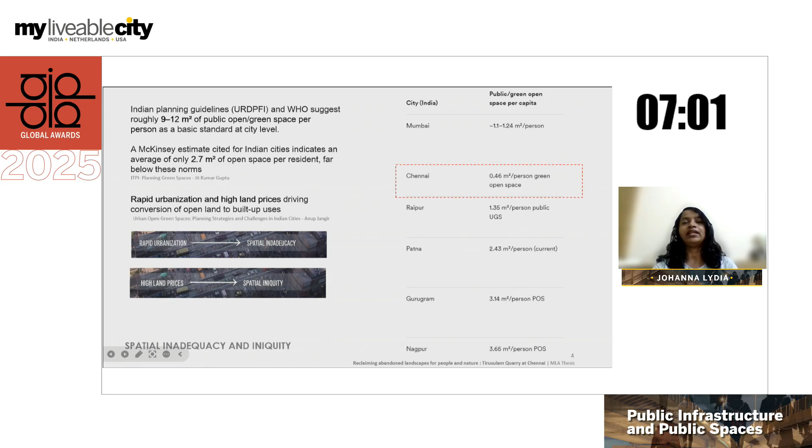When we think of public spaces and infrastructure, we often think of lands like this, streetscapes, or even waterfronts. These, like Chennai, where it's very low, below the standards required by WHO. Rapid urbanization has led to spatial inadequacy and high land prices, leading to spatial inequity. How do we solve this?

By considering sustainable sites which have been abandoned, like brownfields, landfills, or even quarries, like the Tirusulam Quarry, which is my site, much closer to our homes than we have imagined. Because people here in Chennai and even around Tamil Nadu, the state it is located in, come here to visit it. It's a well-known tourist attraction spot here.

But since it's not regulated or developed, and was abandoned in 2012, this has led to many issues, in spite of it having many potentials, like accidental falls, and surrounding industries which happen to come because of the quarry, which is a Charnockite quarry, leading to sand units being around the site, leading to air pollution.

And the government sees it as a potential water source for the city's water woes. And the people in the city see it as a potential tourist spot, and nature sees it as a place to inhabit.

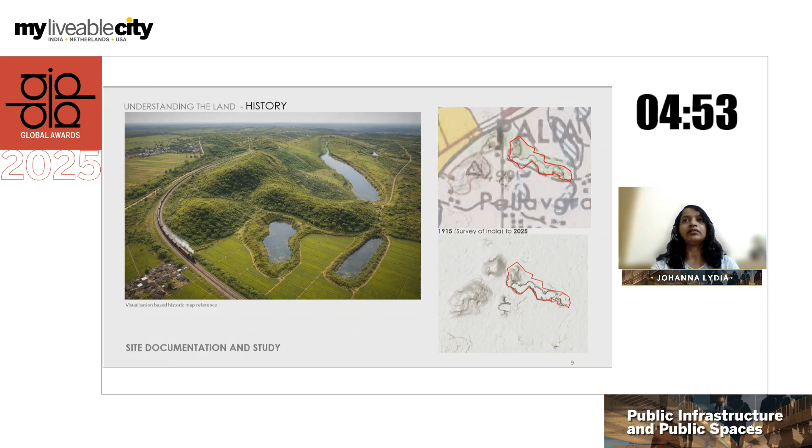And when we see the history and understand the land, we can see that around 100 years back this was a small hillock, and it has been quarried out to become what it is now, surrounded by dense urban area. This once was in the outskirts of the city, and is almost in the middle of the city now.

In spite of it being very well connected, it's very near to the port, connected to stations, connected by city roads. The area itself is not much accessible because it's unsafe, and it's surrounded by industrial zones and hillocks.

Major landmarks around it we can see are very institutional and residential kind of zones. And people often come here for a trek on the nearby hill for recreation.

The land ownership is government land.

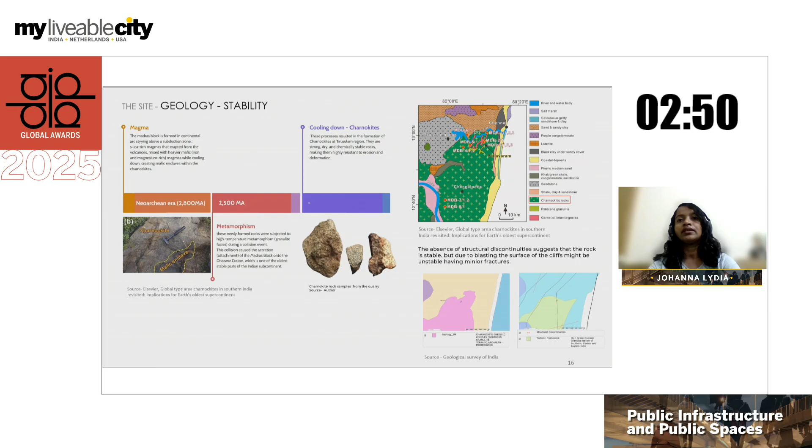When we try to understand the site itself, it formed millions of years back through magma and volcanic eruptions, causing magmatic metamorphism which formed the Charnockite rock now present in the quarry, well known for its strong durability and used as coarse and fine aggregate in construction.

As we dive deep into the landform, we can see it's made of in-situ bedrock with a very thin layer of sand, which suggests we need to reclaim the soil. Since it has been quarried out through blasting, it has a very strong cliff character to it.

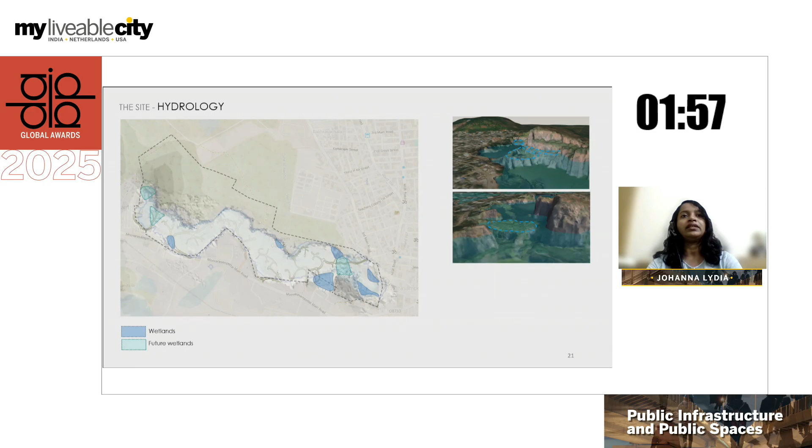Studying the hydrology, we can see there are many types of land within this quarry: highlands, lowlands, and wetland areas. Natural succession has already occurred, and it has become a good wetland space for birds and other wildlife.

At the city level, we can see that it's highly disconnected from the existing canals and water bodies, which in turn connect into the sea.

The quarrying not only affects surface water flow but also groundwater flow, which needs to be reclaimed. Considering the amount of water that flows into it and the peak annual rainfalls, this has huge potential to be used as a freshwater source, which is already being considered by the government.

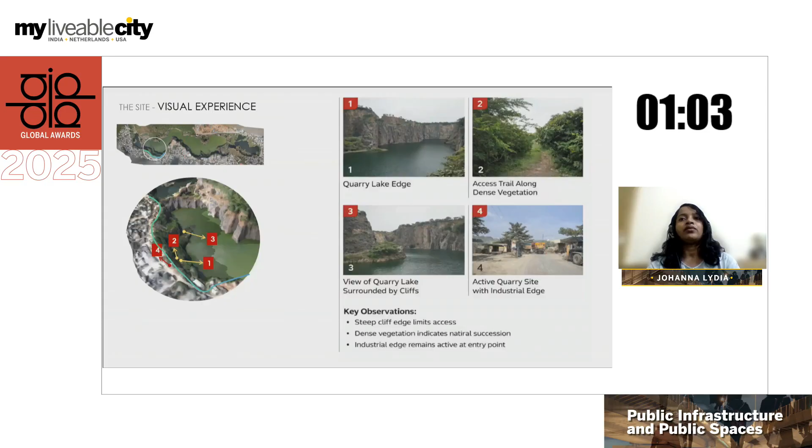Looking at the visual experience of the Quarry Lake, we can see it has huge cliffs, with one half bordered by an industrial zone that is quite dusty. These areas have been visually documented and analyzed.

Ecologically, the area has been covered by invasive species as well as non-invasive species. Through this study, we can see it has huge potential to be developed into a forest ecosystem. Studying the elevation and slope, we can see this can be used for various activities.

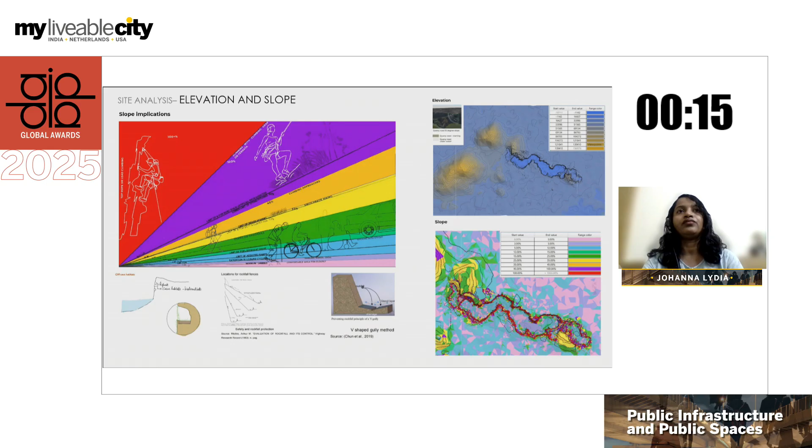These activities include walking, trekking, and other recreational uses. The trees have been documented, and almost 50% are invasive species which have been planned for removal.

When we study the people after visiting the site, we can see that people see it as...

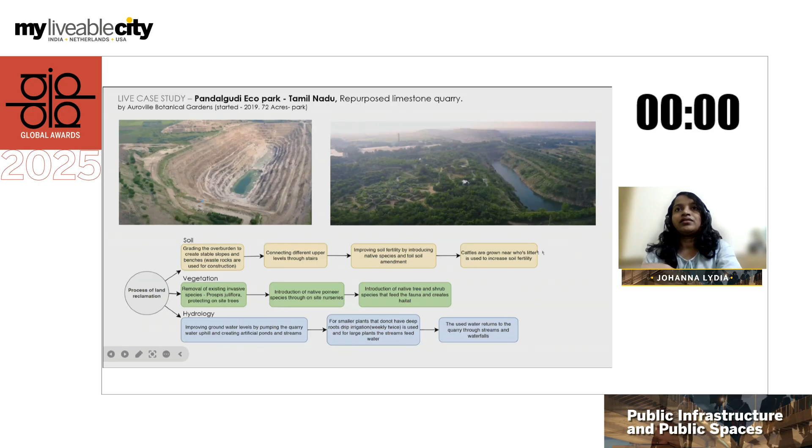Just a minute, I was unable to see the countdown on the screen. Okay, so... okay, I'll just...

Tell us about the design—when you have 8 minutes, you should stay within 8 minutes. Yes, but I was unable to see it. No, doesn't matter, you should know your own time. Okay, yeah, thank you so much.

So, very quickly—my question is, given the site has much potential on the natural issues side, are you still allowing people in your design to go there and disturb it, or are you able to combine the different interests?

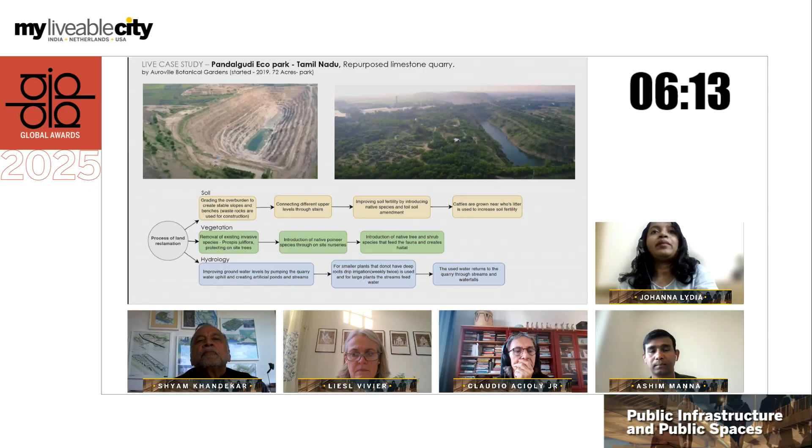That's my question. I'm able to combine the different interests by understanding the people's needs and the site's potential for nature to be inhabited. I'm separating zones of natural sensitivity so nature doesn't get disturbed by people, while people can still safely enjoy nature through boundaries and different types of uses for different age and people groups.

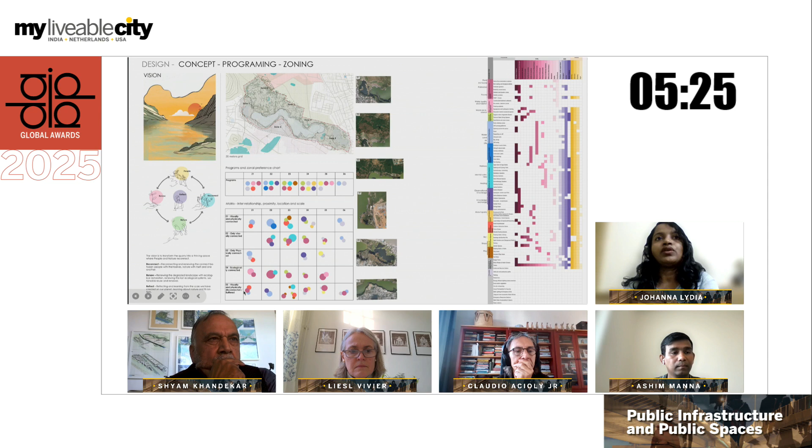In the landscape perspective, I'm also providing native species allocation which helps environmental regeneration in the area. These zones segregate people and nature so they don't disturb each other, while still allowing them to co-exist within each other.

Okay, thank you. Other jury members—I can't see them somehow, but Liesl, Claudio, Ashim, does anyone have a question? Yeah, I do have one. I have a question. Go ahead.

There are many different organizations and people trying to make claims on it—nature, people, but also the city using it as a water source. Do you think the improvements you've brought will allow the government to use it as a potential water source?

Yes, of course, much better because of eutrophication, we can see that the entire thing has become algal bloom currently, and they're unable to use it properly. So by providing wetlands and treatment gardens around this area, wherever the water inlet comes naturally, I'm able to treat the water through natural remediation, making it much better and safer for people to extract. As we saw in the study, the water level rises around 3 meters per year because of the surrounding runoff. So it won't affect the amount of water being extracted, while also making sure that people get water and nature gets water and habitat around.

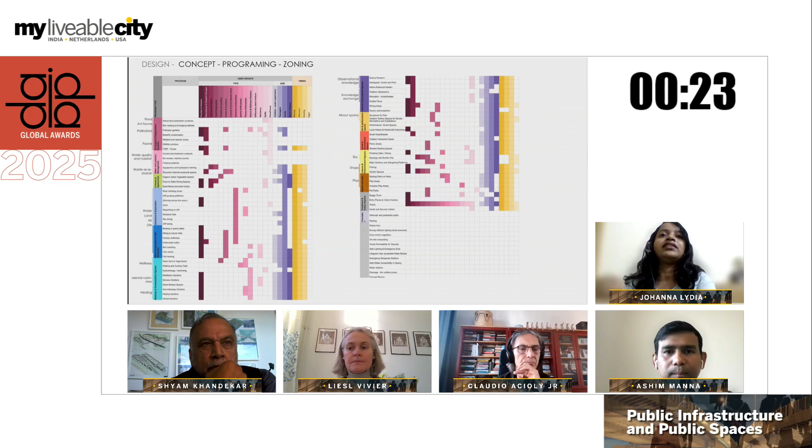Yes. First, when it comes to access, before this design, the site was not very accessible from the surrounding areas because of the landscape itself. So the first thing I'm doing is making multiple entry points and parking areas so people can come from all around the site and access it safely. I'm also creating a border for the safety of the people. There are different types of uses for different age groups and different kinds of people who might be interested in coming here — tourists, people coming for educational purposes, and people of different age groups — which causes continuous interaction between the site and the people, so they don't abandon the site or misuse it. When it's maintained properly, and when they feel they belong there and there's a use for them to come.

Okay, thank you. Thank you. Okay, thank you Johanna, it's a very inspiring project. Thank you for your presentation. Thank you, sir, thank you for the opportunity.

Okay Afak, we go to the next one. By the way Afak, at a certain moment I also could not see the clock, so can you do something about it? I don't know if other jury members could, but I couldn't see the time.

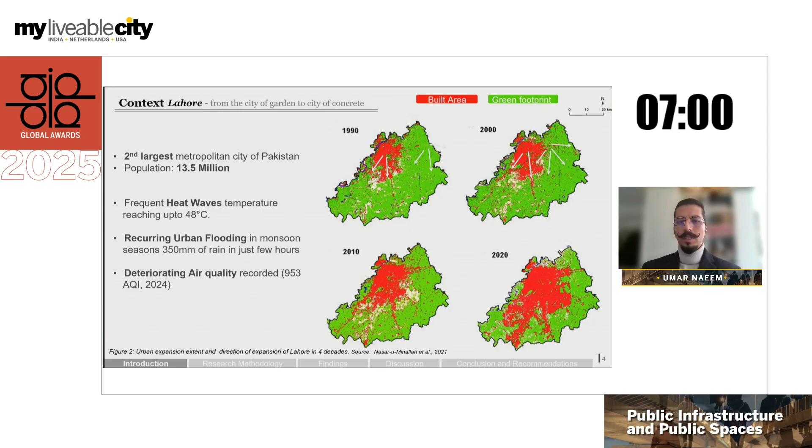This crisis is often linked to green space loss. In the last three decades, Lahore has lost about one-third of its green footprint, while built-up area increased roughly fourfold.

From this setting, I derive my central research statement: this is not only ecological loss. As green space disappears or transforms, citizens are disconnected from everyday nature. At the same time, road infrastructure development projects are narrowly framed as technical interventions, which overlooks the socio-ecological needs of diverse citizen groups.

My research is based on three primary theoretical pillars: objective nature, conceptualized as the physical form of nature, and subjective nature, understood as experiential nature, especially the people-nature relationship. The third pillar examines car infrastructure development as an external driver that impacts both.

This is the conceptual framework which illustrates that infrastructure development affects urban nature, which changes the people-nature relationship, creating both potentials and opportunities to mitigate extinction of experience.

So the main research question is: to what extent does infrastructure development, within the ambit of urban nature transformation, impact the people-nature relationship? I examined how urban nature forms and qualities have changed, how people perceive and interact with urban nature, and the perceived impact of infrastructure development.

For that, I developed a people-nature relationship framework through indicators of perception, interaction, and values associated with urban nature experiences. Infrastructure development impacts were analyzed across ecological, spatial, and social dimensions.

This research was based on a single exploratory case study approach. The 30-kilometer canal, a green, blue, and gray corridor, traverses diverse neighborhoods from low-income dense areas to high-income low-density areas. The road expansion started in 1996, completed around 2018, and included about 7 meters of road widening on both sides, encroaching on green areas.

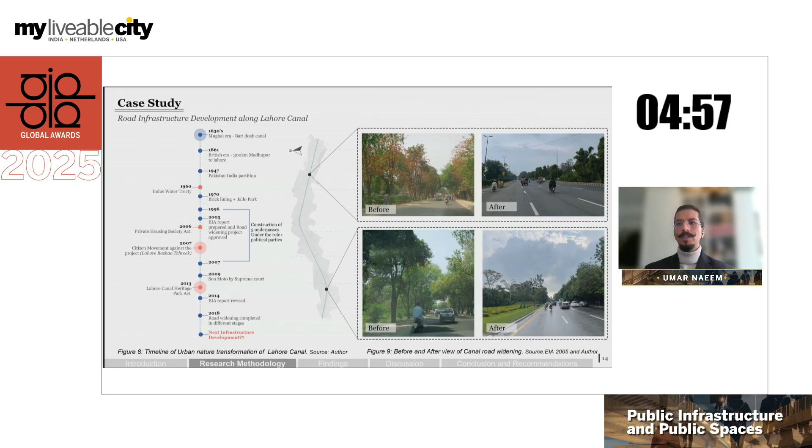Interviews repeatedly linked this road expansion project to the development of housing societies toward the southern edge of the canal corridor. Here we can see before and after images showing how the canal transformed from a green corridor to a mobility corridor. A mixed method approach combining qualitative and quantitative data was used.

Methods included semi-structured interviews, field observation, spatial mapping, and questionnaire survey. Data was collected from March to May, and I divided the 30-kilometer canal into 5 sections. Section 2 represents the low-income, dense neighborhood, while sections 3 and 5 represent high-income neighborhoods and low-density areas.

Coming to the findings, this is the overview and structure of my findings, explaining each research question, and these are a list of few selected findings.

First, the canal's urban nature was physically reduced, and mapping shows the extensive conversion of green areas to road expansion. At key intersections, ecological fragmentation points emerged in the mapping analysis. Approximately 60 acres of green space were converted into sealed surfaces, and 5,000 trees were lost.

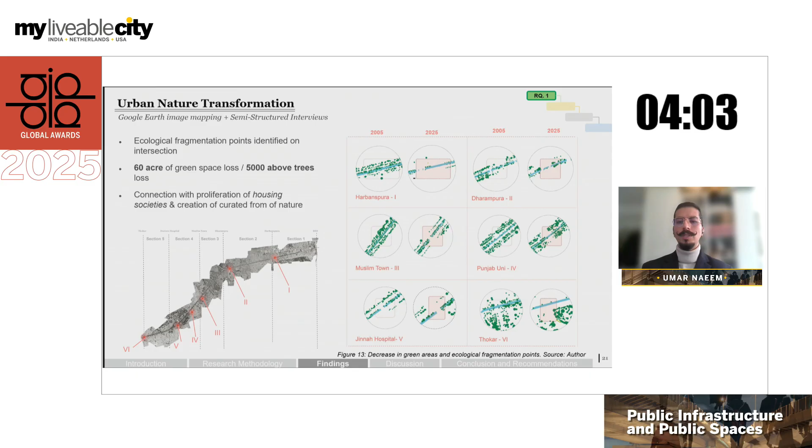But this was not only a loss of green space. The forms and qualities of urban nature also transformed. In some locations, urban nature became more curated and manicured, while in others it became inaccessible and completely erased.

Section 2 showed the lowest provision of green spaces in the vicinity and the lowest tree species diversity, as identified by the PHA, and this was confirmed by citizens as well. They also perceived Section 2 as the most affected area, and Section 4 as the most ecologically rich area.

76% of respondents recognized the canal as a valuable urban nature resource, and knowledge of biodiversity remained high. But there was a mismatch in management.

For example, respondents from Section 2 showed higher preference for ornamental plantation, yet these were the areas with the most eroded green spaces and weakest maintenance. This result shows the contradiction between the gap in maintenance and citizens' preferences.

Interaction with urban nature also showed some disparity, where Section 2 was the most active zone, with activities like swimming, intergenerational gatherings, and citizen-appropriated communal spaces such as Eidgah and Jirga places. All of these activities were happening in areas with the lowest provision of urban amenities and safe access to the canal.

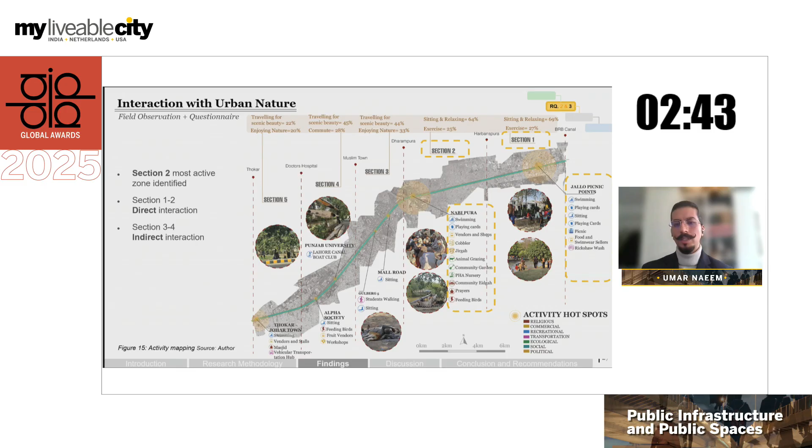This transect analysis shows where the ecologically rich areas and public zones overlap, and where they overlap with noise, speed, and unsafe crossings.

The perceived impact of road widening on urban nature are mixed, but the pattern emerged that most of the negative impacts were reported higher among the women, older respondents, and respondents from Section 2 and Section 1. In interviews, people repeatedly described the sensory disconnection, reduced accessibility, more accidents, loss of heritage trees, and women and children expressed deep security and safety issues.

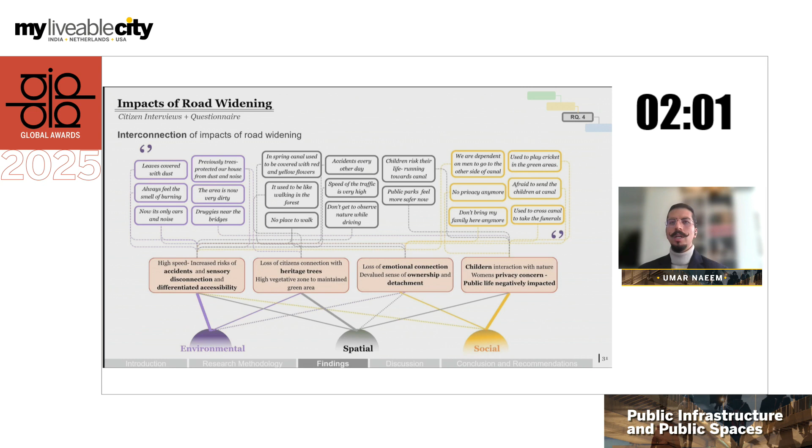All of these notions impact the infrastructure development were found to be interconnected in the dimension of spatial, social, and environmental. Putting this together, infrastructure development transformed urban nature within new settlement and curated green space emerged, while liminal green spaces along the canal found to be most vulnerable.

This aligns with the urban political ecology discourse of how class positionality shapes what form of urban nature is produced and for whom. The perception and interaction with urban nature are not fixed. They are shaped by urban morphology, social demographics, and provision of green spaces.

That was also corroborated with these authors. People-nature relationship with canal urban nature is non-homogeneous. Authorities largely treat it as a mobility corridor, but citizens, especially from dense area, value it as a social and cultural refuge. So in that case, these liminal green spaces offer intermittent opportunity to connect with nature and have a potential of mitigating the extinction of experience.

But road widening introduced new vulnerabilities, and thereby it reverses the effect and reinforces the extinction of experience.

Based on the synthesis of the finding of this research, following recommendations are drawn on a 3-point scale. First level is the site-specific scale, where the zones that are identified as ecologically rich area and high interaction zones, they should be treated as the area-based management.

Second is the corridor scale. Since such urban nature spaces hold significant social and ecological value, these can act as an ecological learning lab in collaboration with schools and universities.

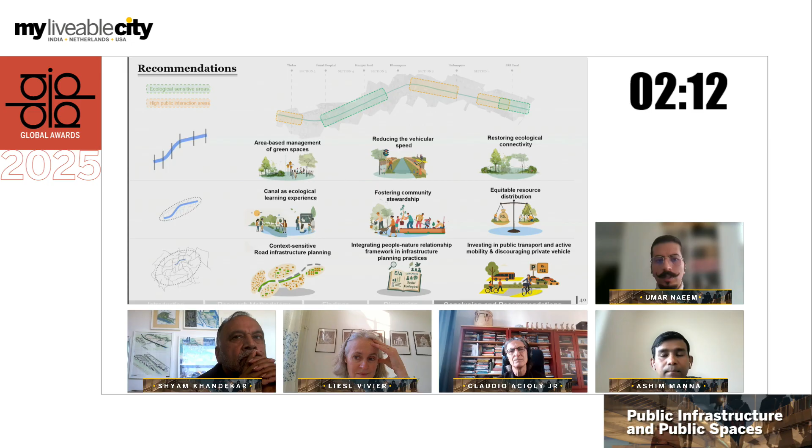Thank you so much, Claudio, for your question. I recommended reducing vehicular speed, but this doesn't mean actively imposing speed breakers or signals. This intervention should be context specific, as I highlighted in my research—there are a few sites which are ecologically sensitive zones, and a few sites which are more public interaction zones. By reducing vehicular speed in ecologically rich areas, we can change the pattern or texture of the road so it becomes more porous. This passive strategy would reduce speed since the intervention has already been done—the road has already been expanded.

In high public interaction zones, more active measures can be taken—after certain points where more people are gathering and where we have public transport infrastructure, we can add a layer of active measures such as speed breakers or crossing areas. That's also one of my recommendations for the planning discourse: the canal corridor is highly heterogeneous, so now we're proposing interventions after the implementation. These considerations should have been taken earlier, so the road infrastructure was designed to respond to the immediate context. I hope I was able to answer your question.

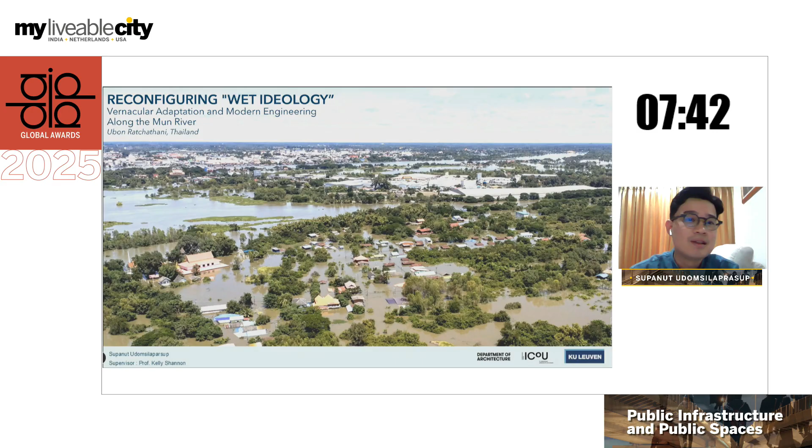This project is located in the Mun River Basin in the northeast of Thailand, the largest sub-basin within the Mekong River Basin. The basin is influenced by the flow of the Mun River, which collects water from the west and flows into the Mekong River in the east.

This dynamic creates an outstanding seasonal floodplain along the Mun River. Particularly the lower part of the Mun River Basin illustrates how the river plays a vital role in shaping both landscape and settlement, responding to topography and seasonality. This led to the selection of a study area within a boundary of 24 by 18 kilometers, highlighting the relationship between seasonal floodplain and settlement.

In the past, as a wet ideology, floodplains were preserved from seasonal flooding and settlements were built on high ground. However, urbanization introduced modern infrastructure driven by a dry ideology, leading to conflict between natural landscape and development. This tension has become visible over the past 30 years of flooding, and it is expected to intensify due to global warming in the upcoming future.

So today the question is no longer whether the city will resist the water, but how it will live with it, and how the city can integrate wet and dry approaches as an innovative design to live with this condition.

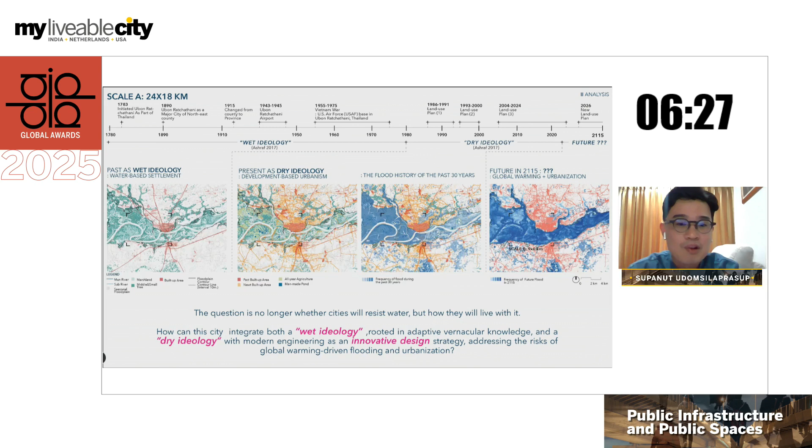To answer this question, the analysis selects a critical area from the 24 by 18 kilometer zone and zooms into a scale of 9 by 6 kilometers, using 6 different maps to show the transformation from wet to dry ideology over time. First, a geomorphology map surveyed by geomorphologists clearly shows how topography and the river shape the seasonal floodplain landscape, reflected in the pattern of water-based settlement. The first urbanization still follows the logic of the water and landscape.

However, today the city has expanded into the seasonal floodplain through built-up areas and massive infrastructure. This dry approach will continue through public and private projects in the upcoming future. Furthermore, according to the prediction for 2115, future development is clearly in conflict with the risk of flooding.

To better understand the transformation from wet to dry approach, the analysis overlaid 3 different maps in the 9 by 6 kilometer territory and proposed several work sites, selecting 15 squares, each measuring 400 by 400 meters.

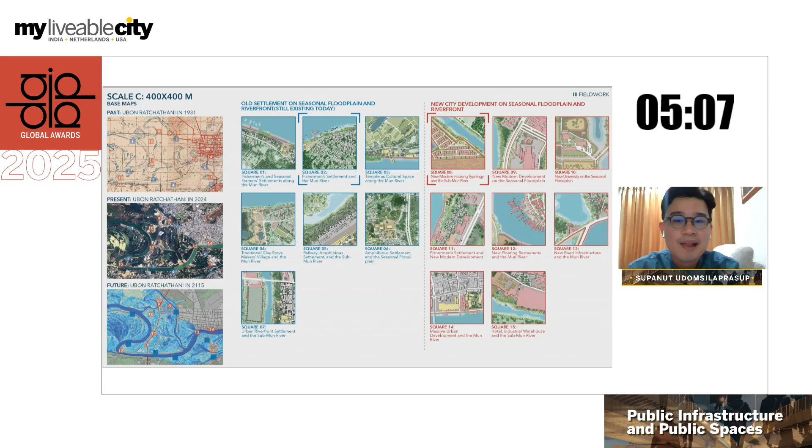7 blue squares represent all settlements that still exist today. Meanwhile, 8 red squares show city development on the seasonal floodplain. In this presentation, 2 outstanding squares have been selected to represent the wet and dry approach.

On one hand, the blue square represents the wet ideology as a water-based settlement from the past that still exists today. Along the riverfront, the settlement maintains its housing typology. This area clearly shows how the settlement still relies on the river as part of its living system.

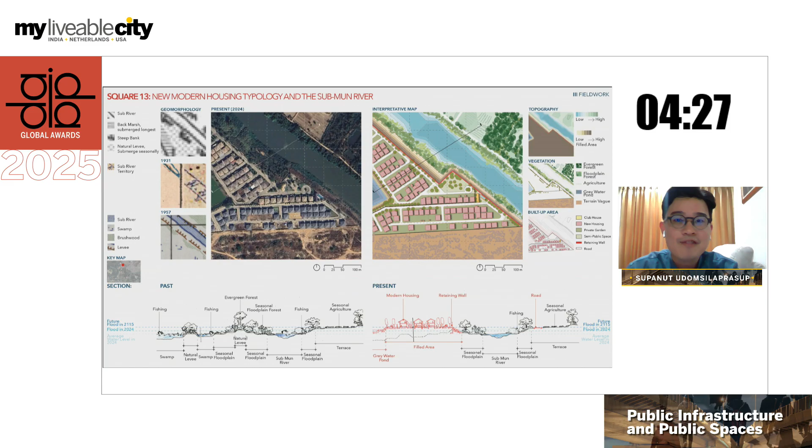On the other hand, the red square represents modern development. New massive housing typologies were built directly on the seasonal floodplain, transforming the floodplain from a public space into private property. So the dry approach clearly shows in this area view, with massive infrastructure driving the city development.

So across multiple scales of analysis, there is a clear conflict between landscape and urban development today. Urbanization will continue alongside increasing risk from global warming. This leads to a design strategy based on a hybrid approach, integrating wet and dry approaches as a water-based urbanism, where water and landscape become the foundation for shaping a new form of urbanism.

So the design begins with water and urbanism to understand the 2 different systems. In the past, water and landscape shaped the logic of the settlement. But today, the territory of water has decreased and been replaced by new modern infrastructure. Also, areas within the seasonal floodplain will be increasingly impacted by future floods.

Consequently, by overlaying past, present, and future conditions, the base map for the design becomes the 6 different landscape typologies in relation to water and landscape. This typology, including higher and lower ground conditions, creates an adaptive framework for new water-based urbanism within the existing landscape structure.

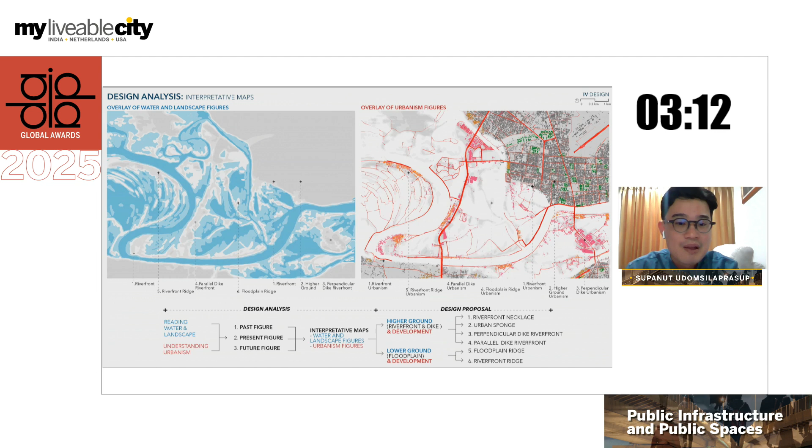On higher ground, a riverfront necklace creates a soft-edge landscape, integrating flood-adapted space while accommodating high-density development along the necklace. An urban sponge introduces a network of permeable landscape within the existing urban fabric, allowing water to be absorbed and stored.

Perpendicular dikes intersect the river, creating strip forest and development that work with the existing dike structure to manage the water flow.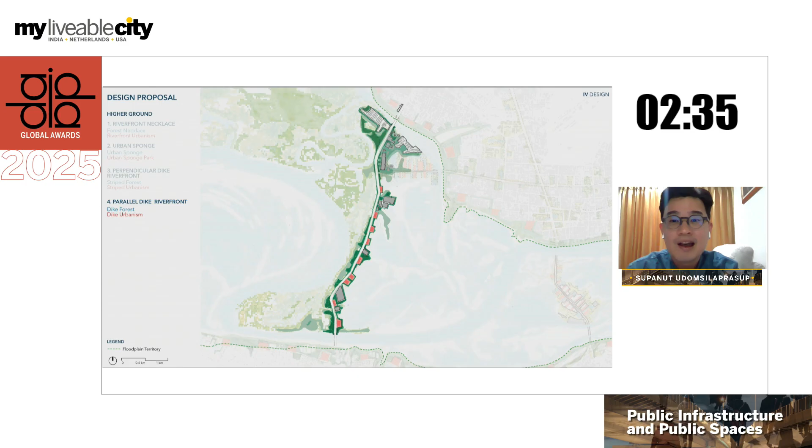Along the river, parallel dikes are developed but only on the existing dike, allowing new urban fabric to develop, while the floodplain on the riverside is maintained for the natural flood function.

Moving to the lower ground, the floodplain ridge creates the amphibian landscape, while proposing dispersal development along the ridge. At the same time, the riverfront ridge builds upon the traditional settlement, reinforcing local adaptation to seasonal flooding.

As a result, the proposal combines 6 different landscape and development typologies. This approach reflects the logic of water and landscape to frame a new form of urbanism. Particularly, the design accommodates worst-case flood scenarios, allowing flexibility and transformation across different water levels.

Hybrid, when translated into urbanism, is expressed through the typology that transforms existing structure into a variety of landscape and development typology.

In addition, hybridity drives into the detail, where architecture and landscape work as one system, merging Thai vernacular knowledge with soft modern engineering, understanding natural dynamics while accommodating urban growth.

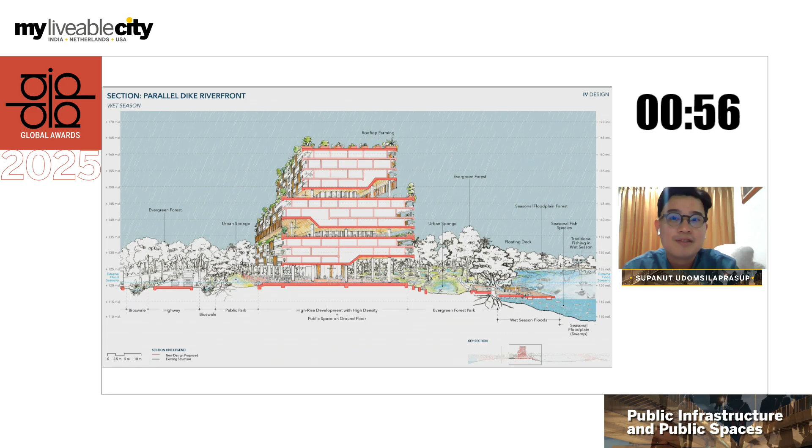So by layering vernacular knowledge and engineering logics, the project also proposes an adaptive framework for the upcoming future. It offers elasticity during the wet season, allowing the city to adjust and respond to water fluctuation.

In conclusion, this thesis clearly challenges the dominant dry ideology and offers a research- and design-driven alternative for future urban development. By reconfiguring wet ideology, the project introduces hybridity with a water-based urbanism approach that integrates tradition with technology, local memory with future climate protection.

By living with the water rather than against it, cities around the world can shift from resistance to adaptation, responding to global warming and urbanization in the upcoming future. So, thank you.

Thank you for your presentation. Very interesting. Yes.

Which of the jury members—maybe Ashim, would you like to, because this is water and land, something you would like to probe, I'm sure. But I'm sure all of us have a question. So please go ahead if you have one.

Ashim? Yes, sorry, I was unmuted. Do you have anything? Yes, I will just ask a small question.

Thank you so much for your presentation. I think it was quite extensively elaborated and very well explained. I think the analysis and the presentation drawings were quite clear for me.

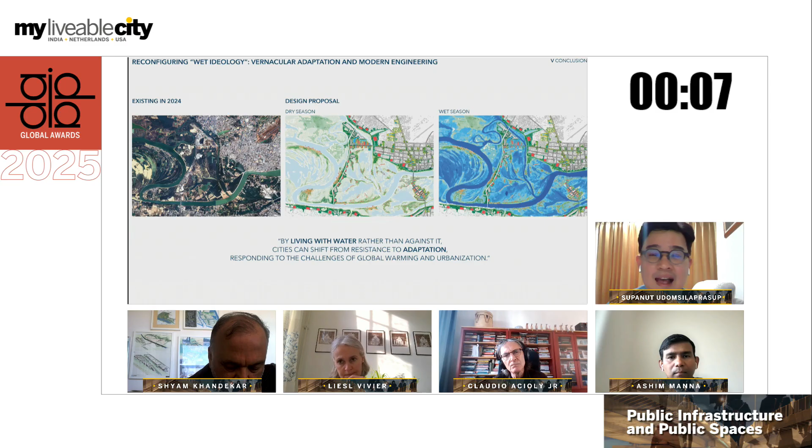I think the point is about how to understand the past, then understand the present, and understand the future. In my analysis, I went to areas where people have lived for more than 50 years - they have an adaptive way, like indigenous or vernacular knowledge, to live with the water. When new development comes, some developments just ignore that. But I think merging both wet and dry as an adaptive way might be useful, and I believe it can adapt to the city. It depends on who can integrate that. My approach is not just top-down, but also integrates bottom-up, and can combine them together.

Okay, thank you. Yeah, time. Thank you, I will pose my question separately, maybe. That's okay, we'll have the next person present now.

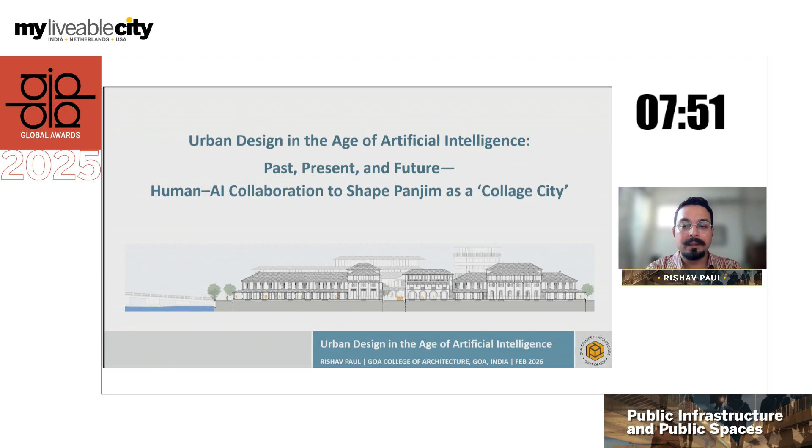Today, I'm going to present my thesis, Urban Design in the Age of Artificial Intelligence.

Urban design emerged as a formal discipline in the 1950s. It is a modern discipline, but an ancient practice. Urban form has evolved through shifts in power, economy, and mobility, from military and trade-based cities to car-dominated modernism. The most severe rupture occurred in the mid-20th century when modernist ideology and the automobile disconnected cities from human-scale urban life. The internet also altered it.

Today, AI marks a new shift, not of form, but of decision-making at scale. Urban design has always balanced intuition and structure, which is now under pressure. Cultural memory on one side, pattern recognition on the other, both powerful, both incomplete alone.

The central question which drove my research: how can humans as central decision makers collaborate with AI, informed by history, to shape future cities into collage cities?

Collage teaches us that meaning is not fixed. It depends on interpretation. Collage City was written as a critique of modernism's obsession with total design. It argues for cities as collages of fragments from different times, logics, and intentions.

Imagine the year 1980. A few years after Collage City was written, a student imagines the perfect city. Using figure ground cutouts of places they have lived, they layer fragments together. Collage as an architectural act of visual thinking.

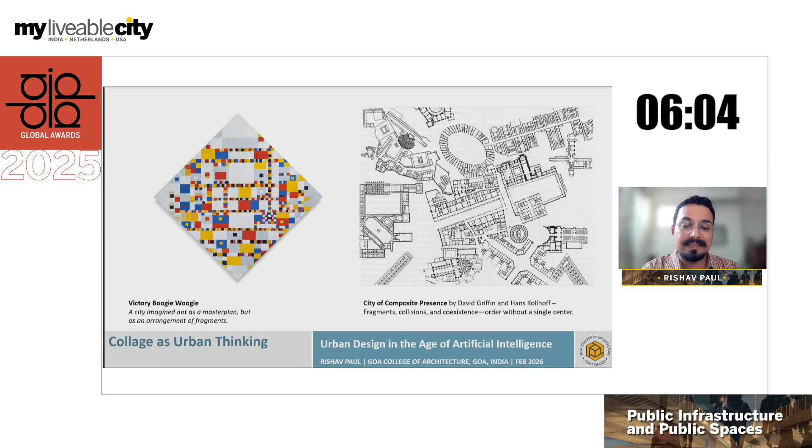As an urban designer, this imagined city is translated into drawings. Plots are defined, densities tested, and controls negotiated. Today, AI accelerates this same process. What was once a physical exercise can now be prompted into visual thinking across multiple media.

To explore this idea, I have developed a framework inspired by autonomous vehicles. Just as self-driving cars have levels of automation, I propose similar levels for AI in urban design.

The urban design automation spectrum ranges from level 0, traditional design, pure human creativity with no AI assistance; level 1, AI-assisted design; level 2, AI co-processing; level 3, human-guided AI design, where AI proposes complete design solutions based on historical patterns but human designers direct and refine these proposals; to level 5, autonomous urban design, a hypothetical scenario where AI would autonomously plan environments.

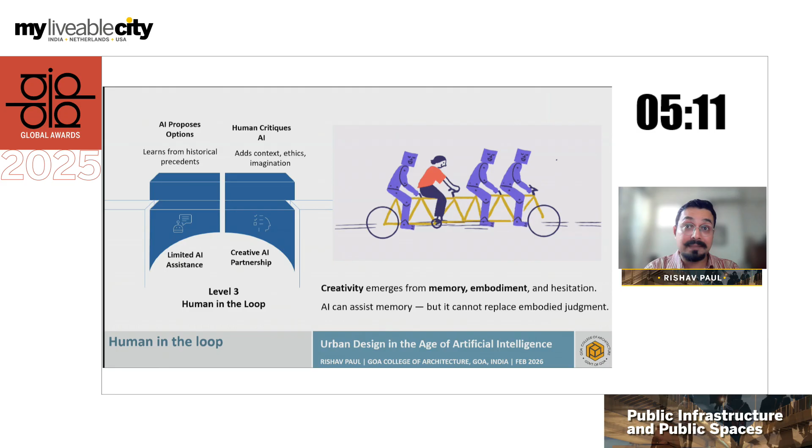I do not propose AI as an author. I propose a human-in-the-loop framework. Creativity is not computation. It emerges from memory, embodiment, and hesitation. AI can assist memory, but it cannot replace embodied judgment.

If AI is to assist design, it must be taught. Documentation becomes the ethical boundary. I documented Saint Sebastian Precinct in Fontainhas, Panjim, a historical site, not as nostalgia, but as a repository of tested urban intelligence.

Human documentation encodes spatial memory, enclosures, thresholds, gradients. This is what the AI is trained on. From human documentation at the historic precinct, the AI internalizes human scale.

It was uploaded to ChatGPT-4 for this analysis. It learned 5 key spatial logics. It identified the chapel as both a geometric and social center, mature vegetation as a privacy screen and climate moderator, and small junction widenings as microplazas that break long streets.

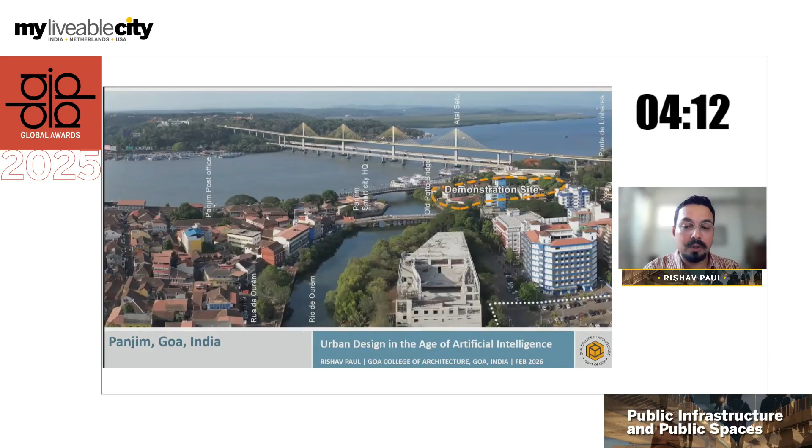Panjim is not a tabula rasa city. Panjim is a layered city combining a colonial urban core with surrounding semi-urban villages, resulting in walkable mixed-use neighborhoods and strong cultural continuity. The Patto housing precinct is a low-rise residential area located between the historic core and the newer commercial developments, currently under significant development pressure.

This structure plan shifts Panjim from a vehicle-led to a people-centered city. The Mandovi River becomes the civic spine linking major transport hubs to heritage areas and public spaces through a continuous walkable network. Traffic is pushed to the periphery, and instead of a single grand gesture, Panjim evolves as a collage of small civic nodes, where past, present, and future coexist.

I've used various AI tools during my thesis. I quickly analyzed Panjim's site through the lens of the 15-minute city concept. It helped map out how accessible key amenities are and reveal what we have already scored strongly on. Using Scenario AI, I unlocked speculative imagination by generating rapid visual what-if scenarios for Panjim, allowing me to visualize possibilities.

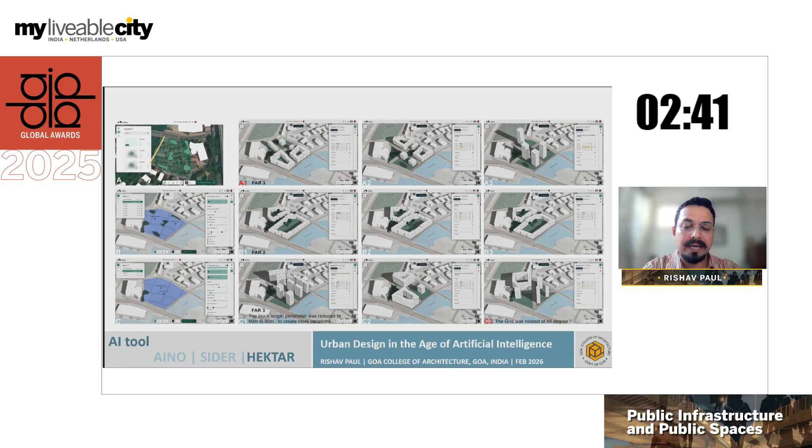Hektar AI let us input familiar parameters like FAR, setback, and height limits, and generated multiple massing options. It works systematically, laying out grids, parking, footprints, and heights. While efficient and thorough, it prioritized functional planning, leaving creative decisions to us.

Hektar independently produced low-rise courtyard layouts similar to those in the San Sebastian precinct. Despite not being trained on that historical data, the alignment suggested context-sensitive outcomes, which gave me the confidence to pursue those options further.

The proposed plan is structured around perimeter blocks with shared courtyards, supporting active streets and collective life. A permeable grid, colonnades, and pedestrian links prioritize movement on foot, while active ground floors and strong corners animate the public realm. Public space and mixed uses work together to create everyday social life. The street elevation shows how the design maintains a human scale, blocks inspired by Fontainhas, while accommodating contemporary needs.

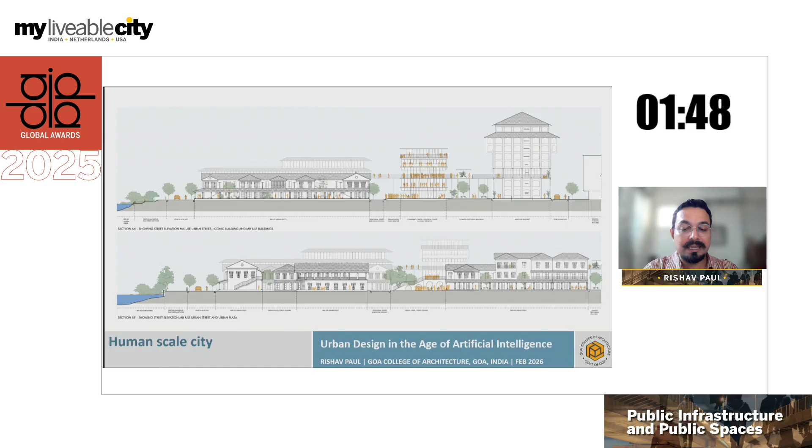The outcome is not a smart city. It is a negotiated city. To conclude, this thesis positions AI not as an author of cities, but as a collaborator in shaping public infrastructure and public space. When guided by human judgment and historical knowledge, AI can support plural, walkable, and inclusive urban environments.

Read through the lens of Collage City, the future city is not optimized or autonomous. It is negotiated, where infrastructure serves people, memory, and everyday life.

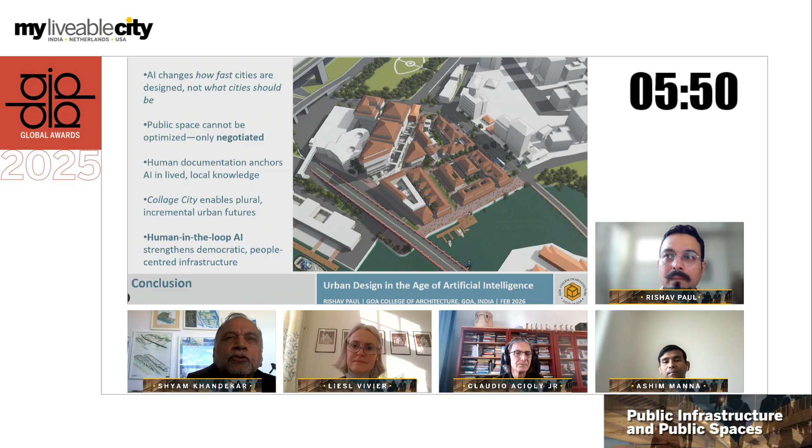This last neighborhood, can you just take us through the logic of how you came to this... I heard you till 'if I could take you to the logic.' Oh goodness, there's something wrong with me. Can you explain to me how you came to this design and which were the prompts which you gave to the artificial intelligence to get you to this? What had you asked?

All right, great. So I'll go move a slide before this. My whole semester, I was trying to understand how AI could possibly be used in doing urban design, but at the same time understanding this designer's dilemma that probably we have a better understanding. So it was not a direct prompt which led me to that, but when I used Hektar AI, it gave me these options which you saw on the right-hand side. At the same time, I was doing this collage exercise with Panjim City. So what I did was I knew of public spaces in Panjim City which work well, which are popular. I'm a resident here for the last few years. Then I tried to validate the options being generated by AI against the ones that were there.

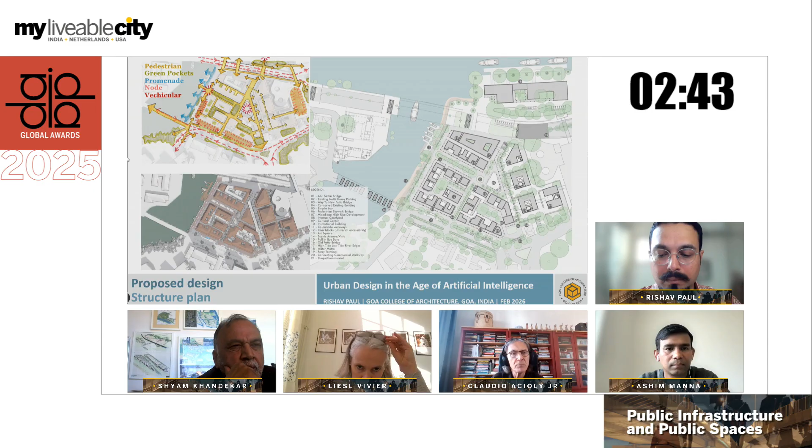Can I come in? Yes, please. Thank you for your presentation. I think you mentioned that we need to teach AI to behave in the way we expect them to behave, to bring us the best of the options to a particular problem. So I think you're demonstrating that there is no way back once we start mastering more and more of the tool. I would like you to elaborate a bit on what are the limitations and the risks that you find while exercising to come to this product, based on the parameters that you showed us - livability, scale, accessibility. So what's the limitation and the risks that it brings with it for the outcome?

Okay, thank you for your question. So I'm going to first try to break this idea of tool - tool as something which is tangible versus, in this case, an intangible tool. And this tool is just like an extension of a human brain. Now, the risks with AI currently is there's a lot of noise, so one has to filter through all of that - number one. Number two, the quality of data that one has. In the context of India, the open source OpenStreetMaps are not well updated. In the case of Panjim, it was, so I could do this particular analysis and move quickly. So that could possibly lead to oversimplification of things. So while I'm saying that the data set needs to be very well trained, let's look at this sort of exercise here.

I mean, in the hands of a person like a student, I would say it's a fun exercise. But imagine the kind of governments we have these days, somebody ends up with this sort of tool and suddenly says, oh look, you're going to design the city right away, not even giving it much thought. So the risks are obvious, I would say.

And coming back to where I was, it's not like a holistic thing, right? It's like a collection of things, a collage of all the available tools that were there. And in this case, I would say there are no curves, it just probably helps understanding the massing exercise. So yeah, I hope I've answered your question.

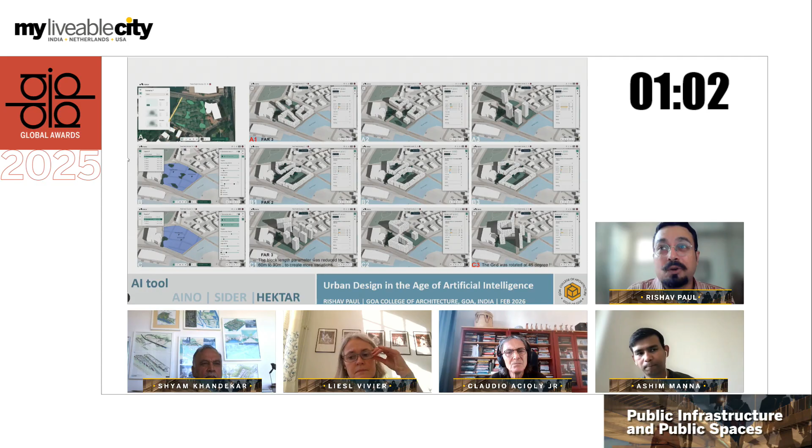Yeah, partly, but it's a dynamic process of mastering, and I think you showed the prompt as a fundamental tool to interact with this tool. Yeah, it's quite promising, and we will have a lot of questions and not sufficient answers in the short coming period.

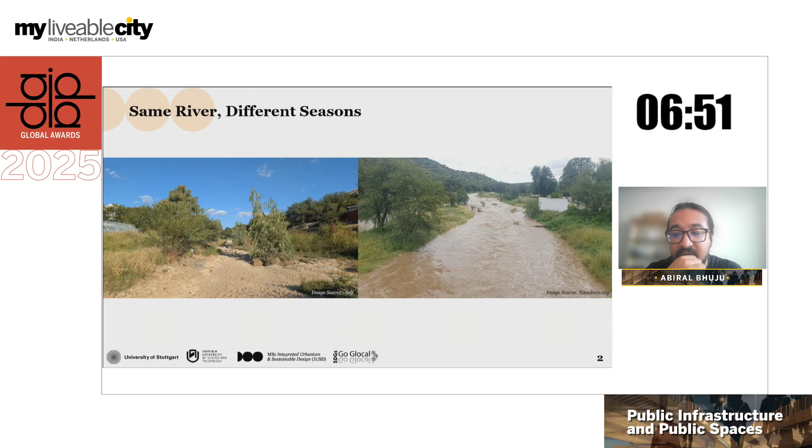Most existing studies on Windhoek's rivers treat them primarily as technical infrastructure, focusing more on flood control, waste management, water management, and environmental performance. What is largely missing are the social and cultural dimensions of these river systems, how residents use them in everyday life, and what they represent in terms of identity, access, and safety.

While global research increasingly emphasizes the need for community participation and local knowledge in sustainable urban design, this perspective remains largely absent in Windhoek's planning, which leads to my central research question: how do community perspectives and local knowledge influence the design, management, and future development of river systems in Windhoek? Sub-questions also explore usage patterns, community aspirations, and how traditional or local knowledge can inform sustainable planning.

Research objectives included documenting and analyzing community perspectives, identifying key themes and local practices, assessing the potential role of community engagement, and developing a set of recommendations and a preliminary framework for inclusive participatory design.

Heading on to the methodology, given the interdisciplinary nature of the research and the need to balance environmental, spatial, and social considerations, a mixed methods approach combining qualitative and quantitative methods was used. Data collection included surveys, semi-structured interviews, focus group discussions, and on-site observations throughout different neighborhoods across the Arebbusch and the Klein Windhoek River. A preliminary findings presentation was also held at the end of the research period, which allowed for the triangulation of data from multiple sources, enhancing both the depth and validity of the findings.

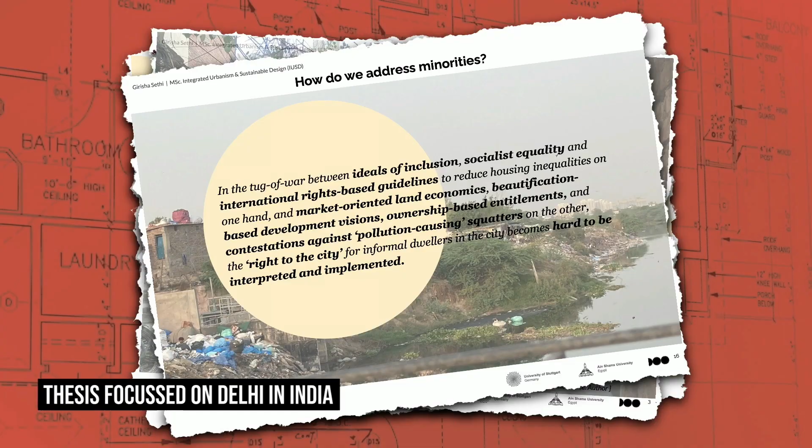When given a particular theme, students are free to interpret it, relying on their own upbringing, life, and work experience. The lens through which students look at it, based on their background or specialization, the cities they choose can be very different. So for example, with our theme of minorities, somebody talked about children, while somebody else talked about women, somebody else talked about widows. It was actually my tutors who recommended me to put my thesis forward for this competition.

So the theme that year was the inclusive city, and it was really relevant to our studio project at the time. The problem we were dealing with was a result of the housing crisis in Addis Ababa, Ethiopia. The background of that is there was mass rural to urban migration, and the government's response was to create condominium housing to house everybody, thus creating quite an uninclusive, very homogenous approach.

This award is open to students of participating universities and educational institutes from all over the world. In the past, they have presented solutions for cities in Egypt, Tunisia, South Africa, Ethiopia, and Kenya in Africa, to India, Bangladesh, Philippines, and Oman in Asia, as well as Ecuador, Colombia, Brazil, Paraguay, and Argentina in South America. The students in these universities come from various countries, making this a truly international and diverse competition.

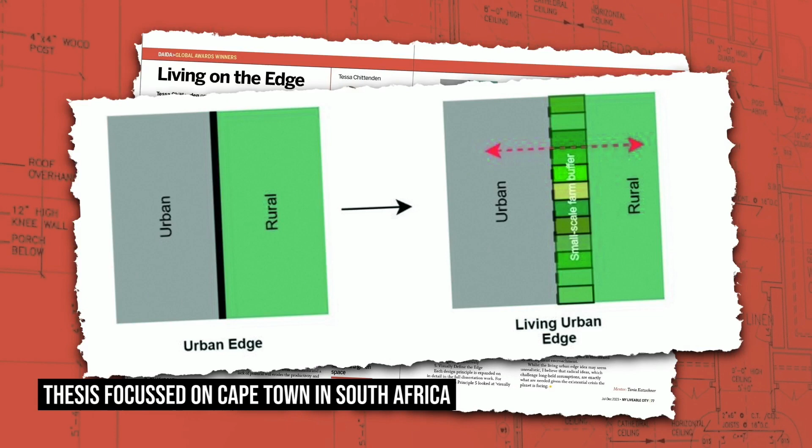After I received that feedback, I took an urban design short course, and I'm considering studying further in the urban design space to deepen my understanding of design and potentially use that to enhance the proposal. My thesis work and the award has placed me in a leadership position in an NGO, where I'm currently leading food systems and food security related projects, which relates directly to my thesis, which looked at food systems and urban food security.

The jury shortlists 10 to 12 candidates who then present their thesis in an online awards ceremony, along with other participants and the professors who nominated them. Participating in a recognized international competition brings students the opportunity to interact with expert jurors and industry veterans, learn from peers all over the world, while defending their ideas on an international stage.

I think what one must remember is that even if you have a very good thesis that's well written, that has a good solution, that has a good argument, even then the thesis may not stand out enough, because we also look at the way that the thesis is presented and how you tell your story.

What we have found is that just by reading it, we have thought, oh, it's a good thesis, but it's not excellent. When the jury has the presentation, and the presentation is really good, then we judge that thesis also on a higher level. While the opposite is also true, that sometimes we have a very well-written thesis, but the presentation and the explanation at the presentation is not so good, then we judge it slightly less. So it's really important how you tell your story.

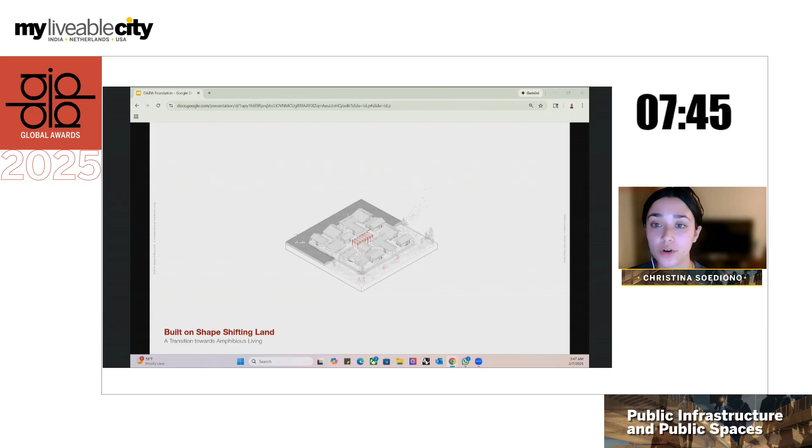The central objective of this research was to establish a viable framework for communities in developing economies that are increasingly exposed and particularly vulnerable to climate-related events. Across the globe, communities are confronting increasing uncertainty as a result of the ongoing climate crisis, with its impacts disproportionately affecting the most vulnerable populations.

Our studio site visit took place in Bangladesh, a country on the front lines of the global climate crisis, where flooding events are becoming increasingly frequent and destructive.

My research focused on a small community in the city of Sylhet, the Shonantala community, selected for several key reasons. They faced great devastation in their life and their belongings, as well as the community gradually being absorbed into the expanding urban fabric. So with a deeper understanding of the local social spatial organizations, cultural practices, and settlement patterns, these insights informed and guided the project's design strategies and the development of an adaptive framework.

So my proposal was centered around this question, with themes such as community building and public engagement central to be addressed throughout.

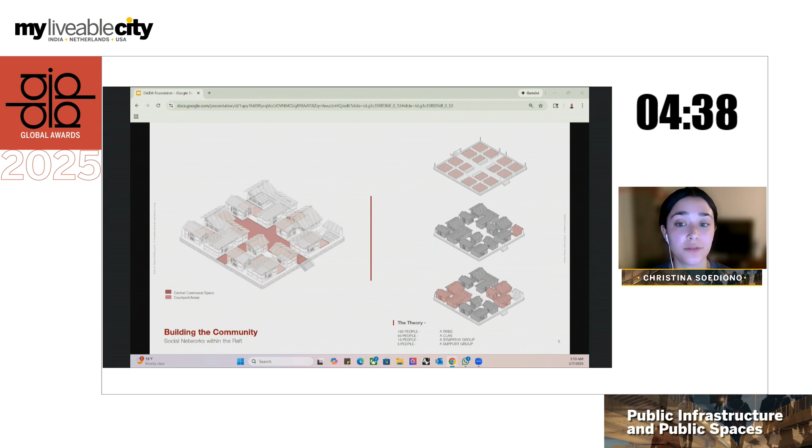These two social scales generate distinct communal and public spaces. At the cluster level, you have shared courtyards that support daily activities such as cooking, social interactions, or domestic labor. At the collective level, the full raft accommodates a larger communal space and shared infrastructure for activities such as festivals or weekly markets, reinforcing social cohesion across the broader community.

Zooming into the dwelling, the theme of community was realized through provisions for residents to adapt the front portion of their homes into semi-public, small-scale commercial spaces. These could be tea stalls, or workshops for pottery or wood, a practice common within the regional cultural context, as it supports household level income.

To further support the community's resilience, the proposal integrates essential infrastructural systems directly into the dwelling design. The overall architectural strategy prioritizes passive heating and cooling, reducing reliance on external energy inputs during flooding seasons. A water collection and septic system are incorporated within each dwelling, providing critical public health support at the community scale.

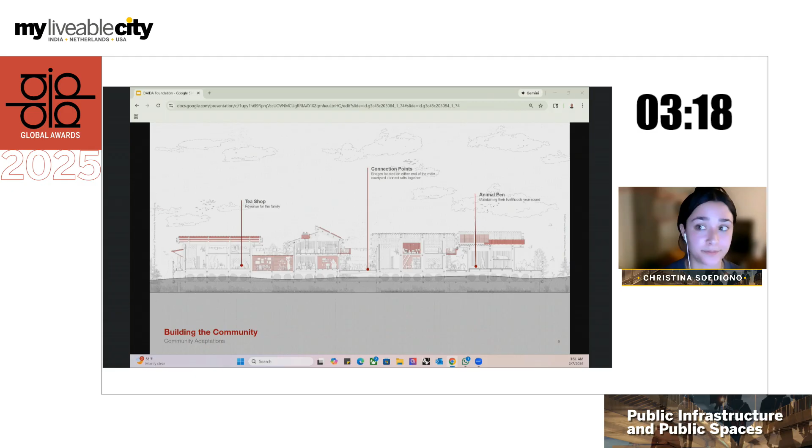These sections below are meant to illustrate the patterns of everyday life as they unfold across the raft. These drawings demonstrate the continuity of daily activities across seasonal cycles, showing how the raft enables a community to sustain established ways of living by learning to live alongside the water and not against it.

Although the rafts may be deployed in multiple configurations, the placement and the master plans must share civic functions and be site responsive, ensuring local environmental conditions and community needs are addressed in order to protect and enhance the community's well-being. For example, in the Shonatala community, it was located with two rivers to the north and south, so it was increasingly susceptible to flash flood events. The implementation of retention areas and debris barriers was essential as a response to these events.

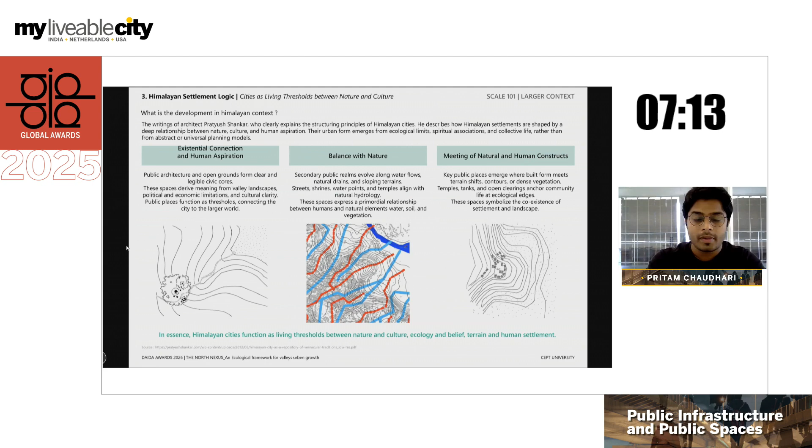However, this condition is not inherent to the Himalayas. Historically, settlements evolved through terrain-responsive infrastructure, where paths and water systems formed a living threshold. You can see this shift in a valley region, which is why I chose Kullu Valley as my design intervention. Kullu Valley functions as a watershed, biodiversity hotspot, and cultural landscape, now under infrastructural pressure because of tourism and rapid urban pressure.

The consequences of this pressure are more visible through water. As you can see in the image, flooding here shows how engineering of river edges and disconnected infrastructure amplify natural events into a disaster. Beyond climate, human pressure further intensifies this condition, where population and tourism growth reveal that ecological and infrastructure capacities are being exceeded. Yet planning responses struggle to address this ecologically — planning frameworks address growth but treat infrastructure as technical, not ecological or spatial. These gaps require a deeper regional investigation.

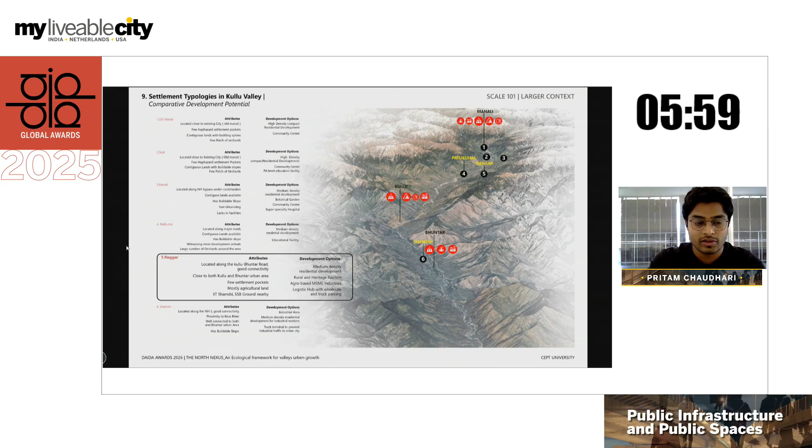Regional analysis shows most of the valley is unsuitable for development, reinforcing selective growth. Within this region, certain elements become critical, where Naggar stands out due to gentler slope, agricultural stability, and cultural continuity. Within Naggar, one infrastructure system emerged as central, which is the Naggar Central Watercourse, connecting forest and river, but now functioning as neglected infrastructure. Understanding this required unpacking its natural systems.

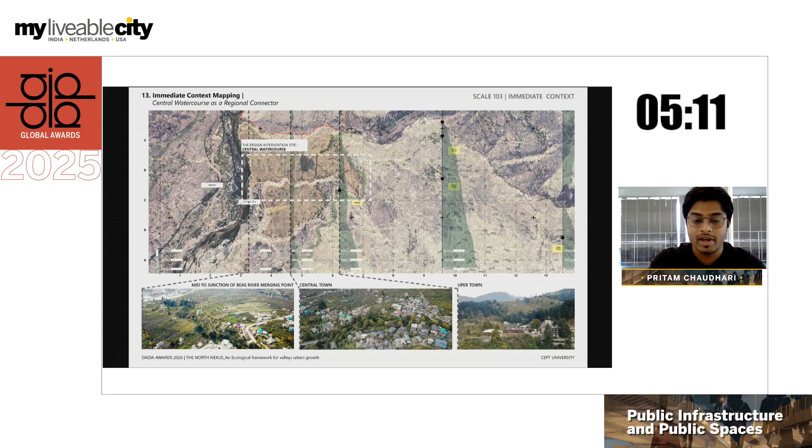Overlaying slopes, hydrology, and vegetation reveals water as a structuring system. This relationship informed a set of guiding rules, where ecological rules ensure stability before occupation, prioritizing bioengineering and no-build zones. These principles were then tested at the immediate site scale, where the site is between the upper settlement and the Beas River, acting as a vein for the Beas River, making the watercourse a natural connector. However, this connector shows varying levels of stress, as seen in the degradation map. The degradation mapping identifies zones where infrastructure has failed, guiding repair over expansion.

To structure this, a zoning logic was developed where I worked on natural layers of that particular region or watershed, according to McHarg's theories, overlapping the entire layers. This translated the analysis into land suitability.

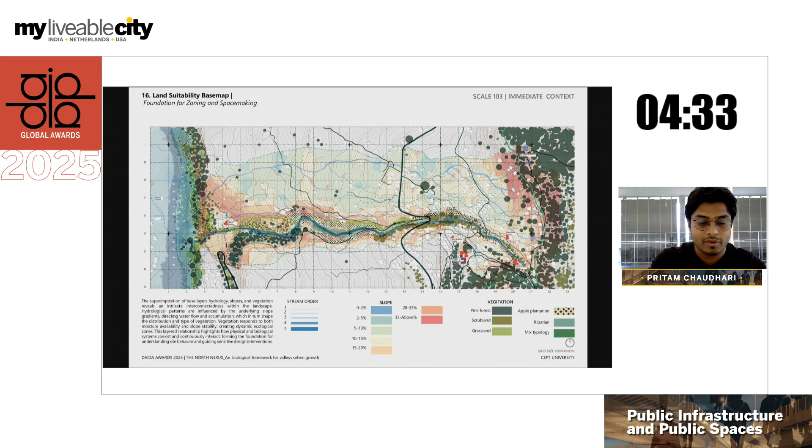It becomes refined where public access and infrastructure intensify. Moderate slope acts as a repair zone, allowing controlled public spaces—you can say these are the tactile transition zones. Beyond this, urban life can re-enter.

So the eco-urban zone is coming, which has a gentle, low-impact control infrastructure. All the layers are there, but there is one layer missing, which is public interaction.

That comes according to the scenic value. Scenic value corridors are developed from the movements and the nodes, where tourism and community spaces can exist together. So all layers now come together in a single system where water forms the ecological infrastructure spine, with development stepping down into intensity.

The logic is explained through a clear design concept, where the framework introduces an ecological spine, a threshold, and funnel corridors. These are the fundamental layers for this region.

This is implemented through phased action. In phase one, we are restoring the ecological infrastructure spine, which is important because the hydrology, the main element of ecology, and the urban spaces are actually surviving through this. So stabilized ecological systems are reinforced.

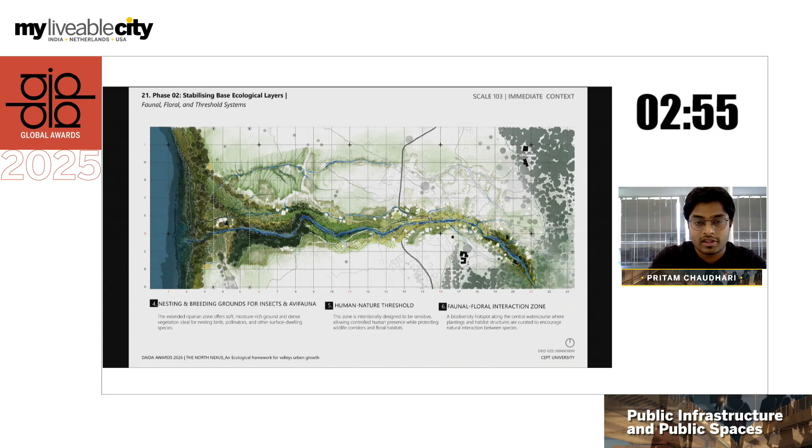In phase two, we stabilize slope, water, and vegetation systems, focusing on the natural layers of the region, and only after this does public access emerge. So in phase three, we introduce public access after ecological stability.

Now, this master plan has a 60-40 ratio of ecology and urban planning, but it can be changed according to base parameters like the natural water course. Ecology is important; also, there is public infrastructure which actually thrives on ecology.

So basically, this entire prototype can be rescaled at the valley scale and the Himalaya scale also. At the town scale, it is redefining the seasonal landscape, emerging as an adaptive landscape. At the valley scale, it is majorly focusing on human pressure and reconnecting the settlement with the ecologies.

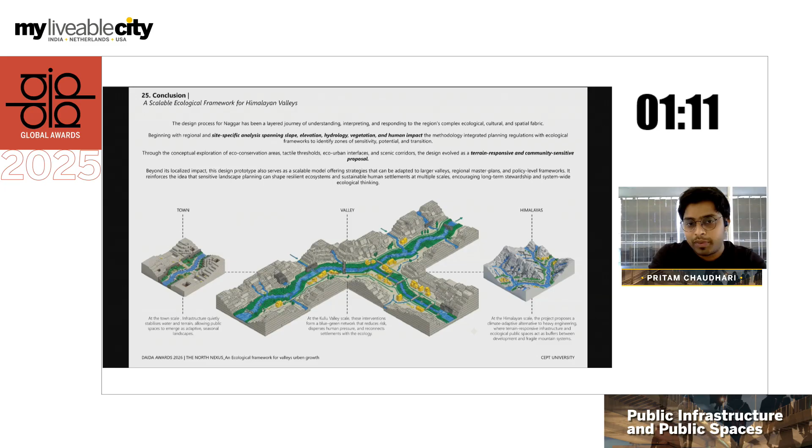In the valley, it majorly focuses on blue-green infrastructure, whereas in the Himalayan region, it focuses on the adaptiveness of ecology and development. The parameters are constantly changing because they are natural, so it can be replicated at a bigger scale and also at a lower scale.

So in conclusion, the North Nexus reframes public infrastructure and public spaces as a single ecological system, stabilizing towns, reducing valley-scale risk, and offering a climate-adaptive alternative for the Himalayas.

To conclude, it requires collaboration between ecologists and urbanists. Thank you.

Okay, thank you for your presentation, Pritam. I think particularly in areas like this—this is just a comment, and then I'll give the floor to Ashim, because I'm sure Ashim will have some questions to ask.

One of the issues in such beautiful areas is also tourism. I'm happy that you talked about it, that you tried to build that into the infrastructure, public space infrastructure, because that is very often missing, and then the tourists overrun a place. But at a certain moment, tourists also have to be stopped at a certain scale, right?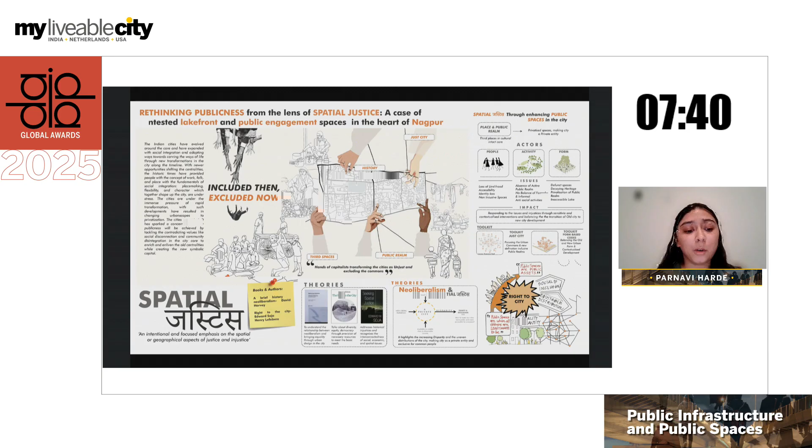Good morning and good afternoon, everyone. I am Parnavi Harde, currently going live from Toronto, Canada. My thesis is Rethinking Publicness from the Lens of Spatial Justice, which examines how contested lakefronts started. The project addresses spatial injustice by balancing the old and new, ensuring public space remains inclusive. The focus is on the intentional creation of public spaces that accommodate multiple users in Indian cities. Neoliberal development has increasingly privatized public realms, displacing informal users and eroding livelihoods. This is the research study I have done myself, layer by layer segregations through readings, to understand how I can attempt to solve the issues.

The site lies within Nagpur's historical mill belt along the lakefront. Once vibrant and productive, post-industrial decline and fragmented ownership have created speculative pressures. I observed that informal vendors, workers, and nearby residents depend on this space daily. It is densely populated, yet has no formal claim. The focus is on creating spaces that bridge formal and informal needs.

I start with the cotton market precinct, which is currently fragmented, a lost and dead zone. The intention behind activating it is to reconnect into a vibrant, inclusive public space. Once the city's most active public realm in pre-independence times, it can now become a city-level magnet, linking heritage, commerce, and informal activities.

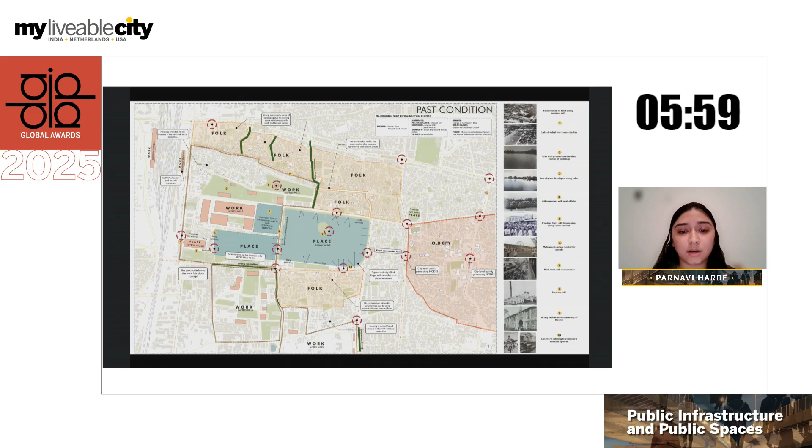Nagpur grew from the small Mahal area, evolving into a city where mills, lakes, and leisure areas were closely intertwined. The workplaces, mills, lake, and leisure areas created vibrant, dense, walkable communities. We observed multiple cultural diversities in the maps with different types of markets, and social bonds strengthened with the connection of the lake.

But today we see different multiple layers that I analyzed: different housing types, different economic profiles, different ethnic groups, and also how the lakes and the dead areas are quite impermeable.

Once the lake, which was highly active, is now inactive despite being central to the city. The markets bustle, yet the lake remains disconnected. The analysis stark inequality between privatized communities which occupy large chunks of land and are dead, while dense and diverse communities have all the activities spilling over onto the streets. There is minimal public life in dedicated spaces, but maximum public life on the streets. Everyday interactions occur, but no inclusive dedicated spaces exist.

The precinct is very unique because it has a lot of festival character, culture, and heritage in it, and some festivals are unique to this own precinct. A lot of activities are happening here, but if we see the condition, the lakefront is dead, a lot of streets are unsafe, there is potential land left defunct, and amenities that existed earlier are not being addressed now. This highlighted an urgent need to reclaim civic spaces and inform the intention behind every intervention.

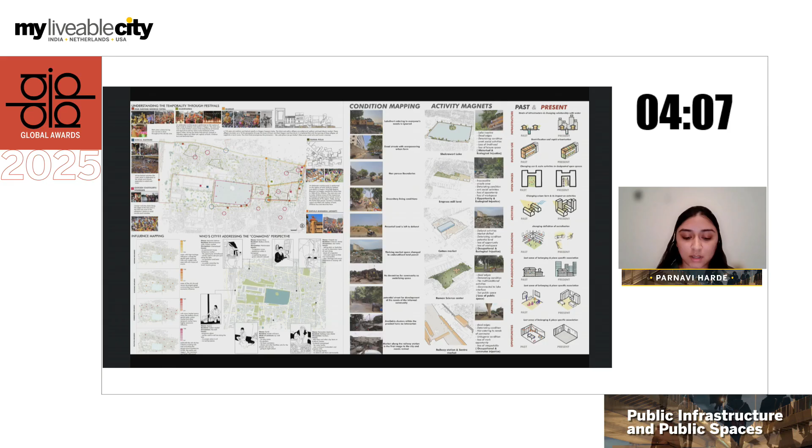I identified five urban magnets: the Cotton Market, Raman Science Center, Shukravari Lake, Railway Metro Node, and Empress Mill lands. Connecting these anchors is an attempt to create a coherent, inclusive public realm, heritage, and the right to the city. The idea behind these interventions is to balance privatization pressures with social diversity, unlocking the site's potential. The strategy structures the public realm through everyday spaces, visitor spaces, heritage zones, informal activity areas, and city-level spaces.

At micro level, these were the findings, inference, and possibilities. I personally went to each and every site and tried to understand how these findings and inferences can create a possibility towards activating this public, towards more publicness and public realm.

At macro level, neighborhood connections to the lake are strengthened. Major anchors like the lake, cotton market, and mill lands form a city level engagement space integrated into a wider urban network. The focus is to address spatial injustices while reinforcing the precinct's identity and historical significance.

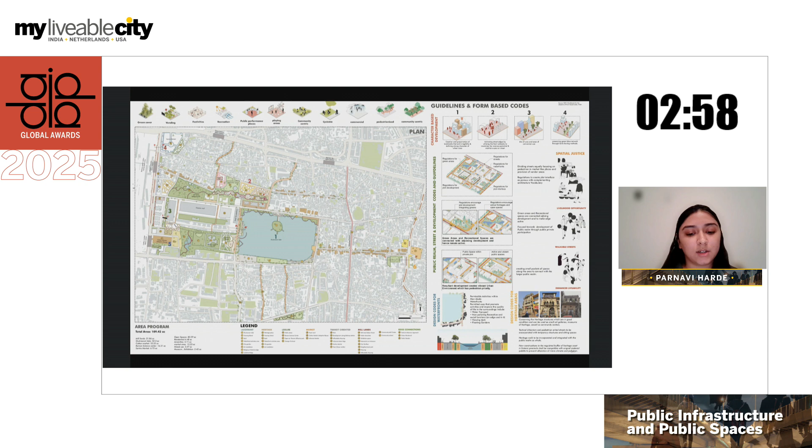The structure plan is to activate the precinct through a symbiotic relationship between informal needs and formal economic activities. City level open spaces are created to increase interactions, connections, and activities. Adaptive reuse of existing buildings supports informal uses, while informal plazas provide dedicated street activity spaces. The idea behind redesigning these streets is to connect, integrate heritage, and create an inclusive public realm.

If we see the details of the plan, it emphasizes the character development of the lake, with public realm street design codes for the precinct. Shukravari Lake is now transformed into an inclusive edge with cycling tracks, small parks, small spaces for exhibitions, where vendors can sell their items, as well as formal visitors can have a quality of life throughout the day.

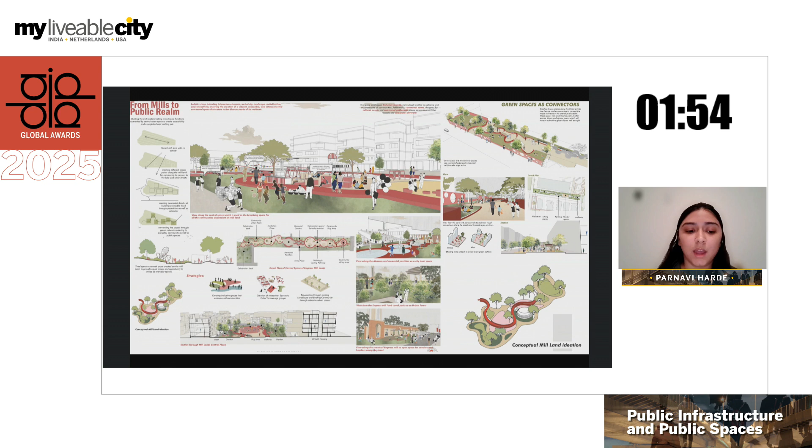Mill lands, which were once vacant, shall be revitalized into holistic communal spaces, blending inclusivity, cultural events, markets, and green spaces. These green spaces act as a connector, linking the precincts and enhancing connectivity, encouraging interaction between formal and informal groups. The cotton market, once highly active in the pre-independence era, again became defunct, and the intention of adaptive reuse is to turn it into a celebratory public realm.

Its location near the railway station and metro node is very strategic, strengthening the network of pedestrian and metro connectivity, making it more usable in the Indian context, where walkable, vendor-friendly, and commuter-oriented streets are a necessity in India.

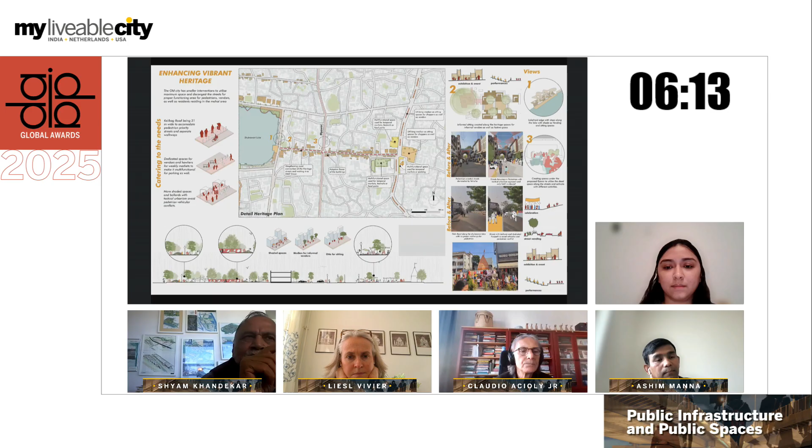You have suggested some interventions at the edges—I saw some steps. That land which you've shown, have you reclaimed it from the lake itself, or is that land already available? The land is already available. I have tried to keep it as much of a water body as possible, and the walkways which are created will be above the water; I'm not trying to reduce the area of the water body.

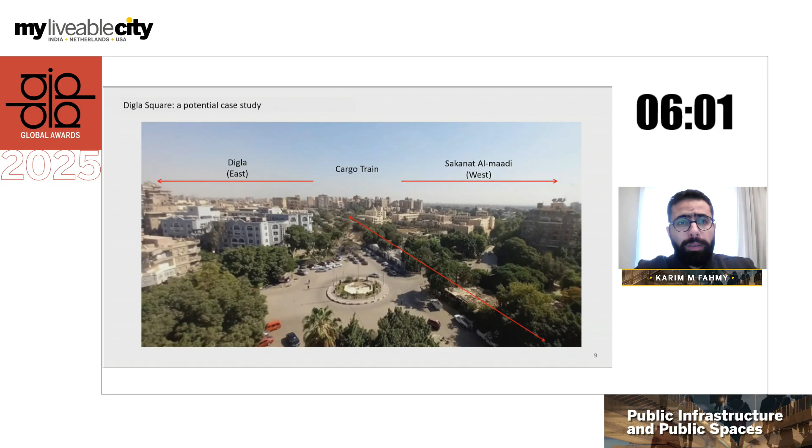Hearing that, one would imagine that the square is a sophisticated and unprecedented design. But Digla Square is exactly the opposite. It's a small roundabout located between two middle-brow neighborhoods with a central fountain and a number of kiosks, surrounded by several roundabouts forming a network. However, it represents a great opportunity to explore platforms of intergroup contact that overcome the effect of social segregation.

Aim and objective, moving to the methodology. Acknowledging the complexity and sensitivity of this phenomenon, this qualitative research started by constructing a theoretical framework, which provided a structured approach to guide the research process.

Offering a roadmap for both data collection and analysis, it combined theories from sociology and human geography, which focused on human behavior, social interaction, and cultural context, and urban design literature, which involved the exploration of physical setting.

The framework was tested in the fieldwork. The objective of the fieldwork was to gather rich data about the phenomenon under study. Observation documented variations in activities and encounters across times and occasions, while field notes, sketches, and photographs recorded physical setting and social patterns.

This has been triangulated with interviews which revealed subjective perceptions, emotions, and social relations that shaped users' engagement with shared environments.

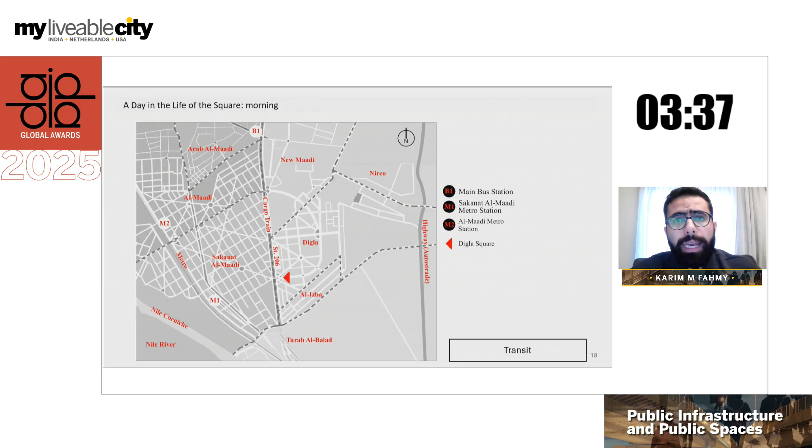The square acts as a transit point. Taxis and minivans use it as a main stop, which encourages some trading activities. Here we see a taxi driver standing, looking for customers while staying in the shade, doing optional activities, which will surely be followed by some social activities with friends and peers.

The diversity of activities is allowed because the vehicle traffic flow already segments the square into smaller pockets, which each group can take and use for different activities—again, trading activities, both formal and informal.

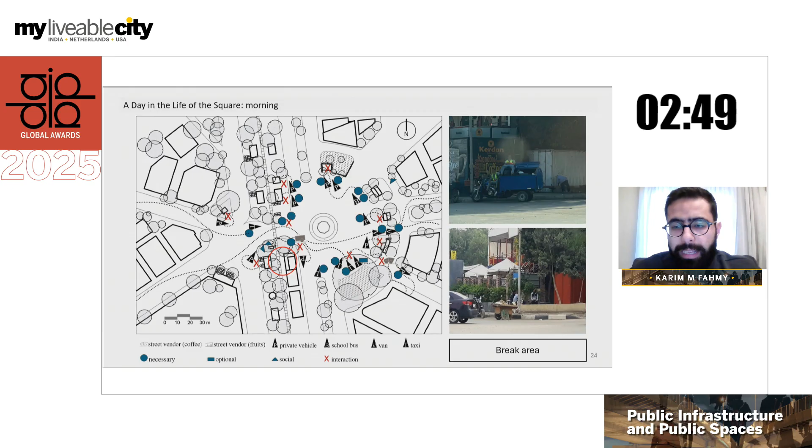Also, the square acts as a break area for the residents and workers, whether these workers are working at the square or in the surrounding area. It has some amenities which make this possible.

It's also a social arena and a meeting spot which hosts both planned social activities and by-chance social activities happening in the center of the square itself.

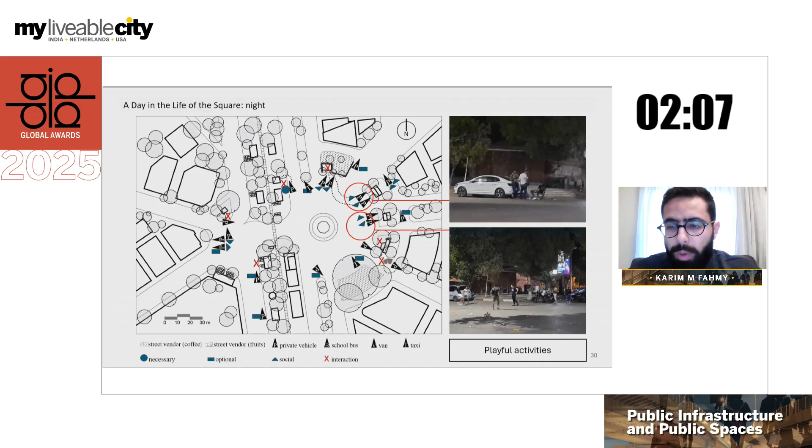Also, the extension of the square can host activities of public solitude, so people can be there without having active interaction with others. And at night, when traffic flow is minimal, the square hosts unexpected activities like playing football, for instance.

So here we see that the square affords people with things that they don't have elsewhere—okay, so maybe it's a snack from the kiosk or a spot in the shade that can be used in the hot summer days.

Moving to the second theme, it presents the square as a place to appropriate and personalize. This theme reflects on the sense of belonging to the square.

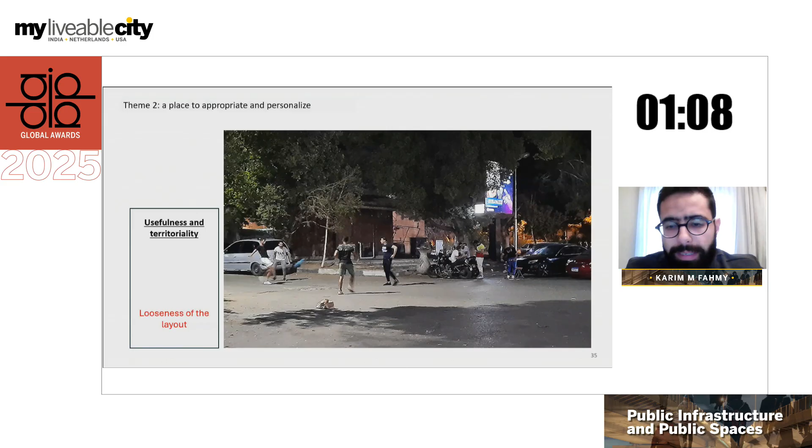As you can already observe, the square doesn't have furniture, doesn't have seats, and this drives people to bring their own seats. They also sit in car trunks or on scooters. This gives them a sense of appropriation and a sense of belonging to the place itself, making the place an extension of their own houses.

The third theme is about eliminating sources of social discomfort, allowing social engagement to occur. Here, the landscape plays a role thanks to the presence of old evergreen trees. Central to the square layout is a water body, the fountain, which serves as a lookout where people usually orient themselves and therefore avoid the awkward gazes that can occur between people who already have tension between them. The street extending from the square also serves as passive participation in the social life.

The relatively small scale of the neighborhood allows for people to get to know each other. People tend to follow the tacit rules and avoid troubles. Taxi drivers, vendors, and other categorical strangers are considered open persons who are easier to communicate with, and whose presence comforts the vulnerable groups. Special occasions form a chance to participate passively in the social public life.